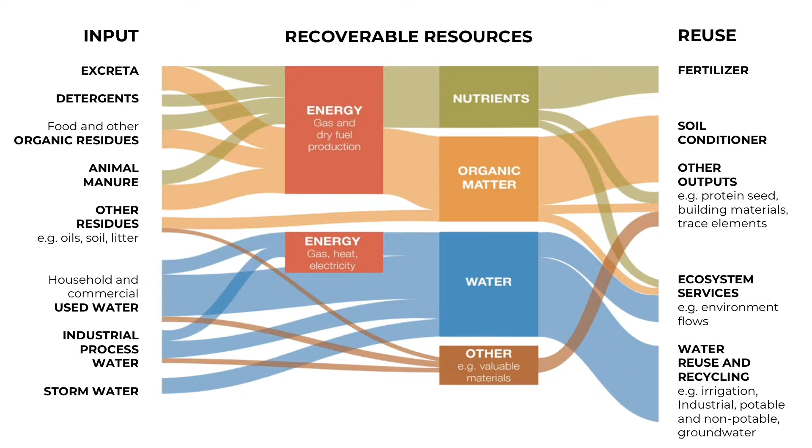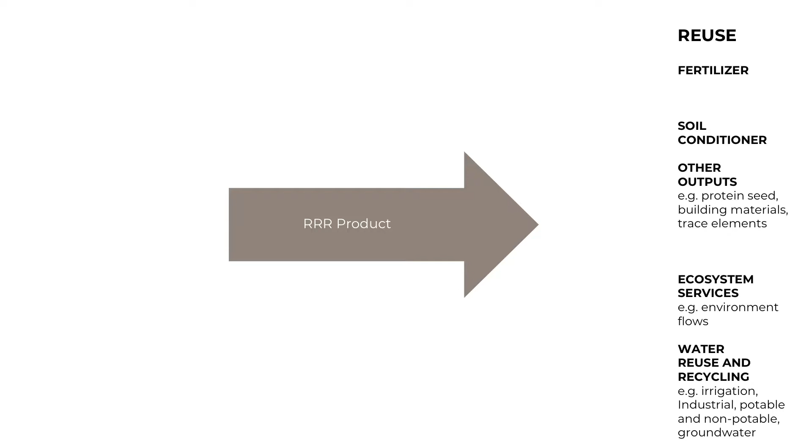To get us started, let me go back to the overview of waste resource options that you were already introduced to in module 1. On the right side, you have the RRR product options that you will eventually envisage to sell. On the left side, you have the raw material that you need to get there: human excreta, organic residue, animal manure, and used water from households or industry. Remember, this is the most important resource to actually get to a RRR product, so you want to make sure it is available in the desired quantity and quality.

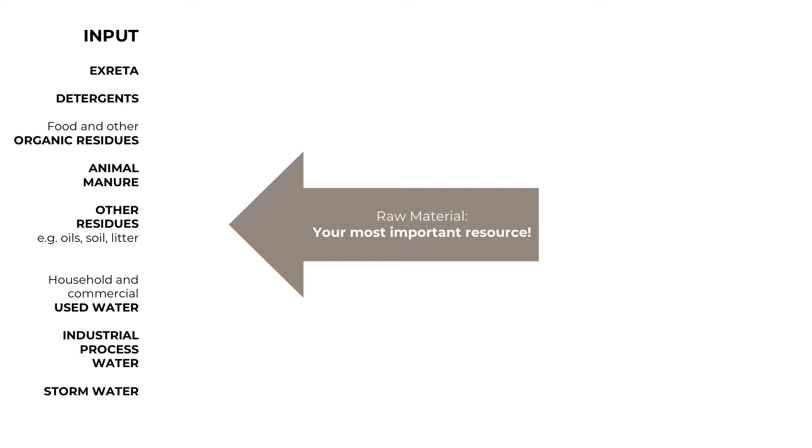If you think about it, waste is simply unutilized raw material that is discarded by someone because it has no value to them.

If we think this through, it's a very individual thing to see something as waste. Since you're interested in becoming a RRR entrepreneur, you probably see this slightly different already, as you know that technically waste is made up of different materials and chemical compounds which can potentially be utilized in a different way, like nutrients, water, and other valuable materials.

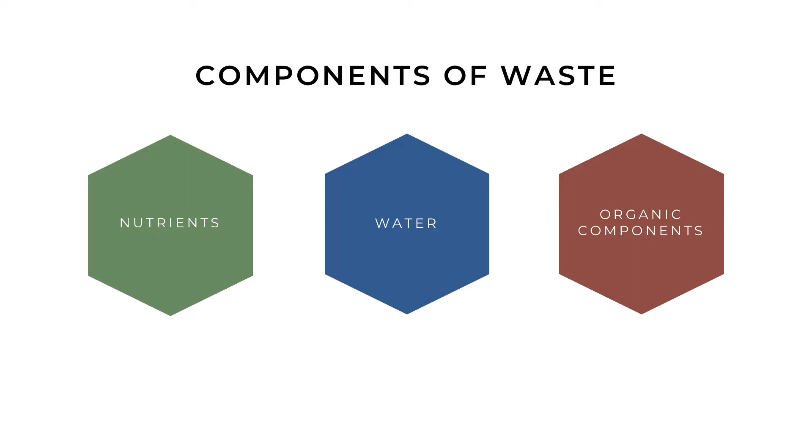While society in general has understood that paper, glass, metal, and plastics are valuable materials that should be recovered and reused, people are hardly sensitized to the value of nutrients, water, and other valuable materials, with a few exceptions.

Singapore, for example, is a country with very little access to fresh water. This is why they recycle the bulk of the wastewater for non-potable industrial use and cooling. This is equivalent to about 40% of Singapore's daily overall water demand.

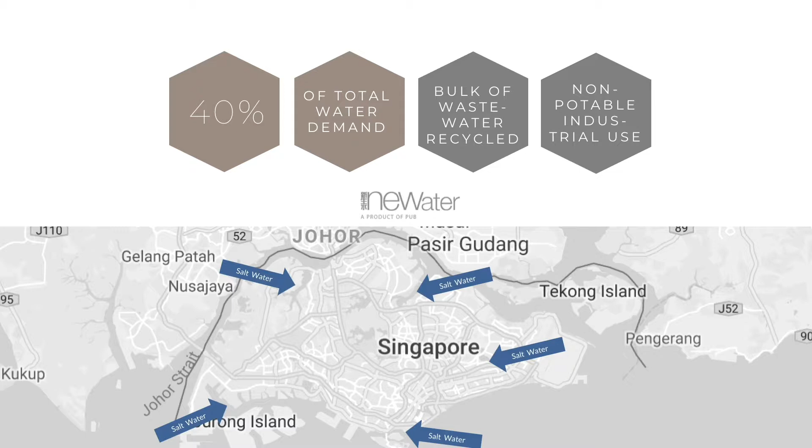Building on that nice example, just be aware that what people consider as waste depends very much on an individual person and their needs, the location the material is at, the potential for future use, the timing of use, and many other factors.

These factors are not something you have to analyze comprehensively right away, but you definitely have to keep these in mind when you get to analyze your customers in Module 3.

But let's first look at the challenge, which is basically finding the value or the added value that you can derive from waste in order to convert it into a business.

Sounds complex? Agreed, but let me give you an example. Let's look at A2Z Infrastructure Limited. This is a RRR business from India, which has formed a public-private partnership with the municipality to produce nutrient-rich organic fertilizers from municipal solid waste.

Market waste is primarily organic waste, such as leaves, skins, and unsold food discarded at or near food markets. Wastewater is a combination of water and waste from, for example, the kitchen, bathroom, or toilet, discharged by households and institutions as well as industries. Wastewater is often mixed with stormwater, and it is typically transported through a sewage system.

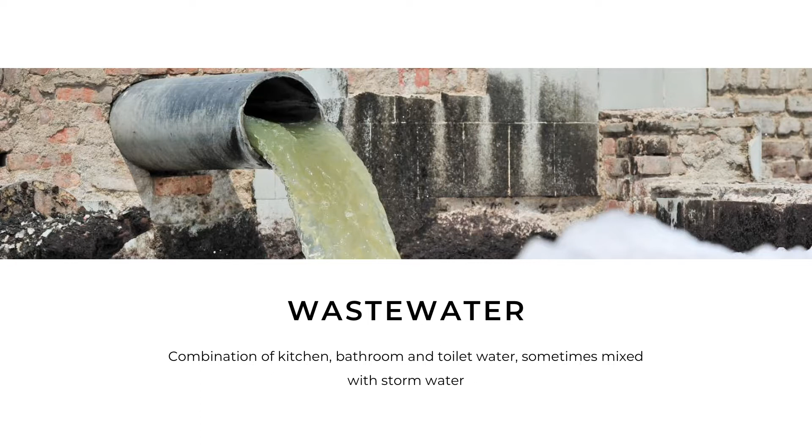When we move on to fecal sludge, we're looking at human excreta that is contained oftentimes in pits and vaults, where the household is not connected to a sewer system. Be aware, pit latrines and similar solutions are the predominant toilet systems worldwide.

Agro-industrial waste are agricultural and industrial residues. Agricultural residues can be further divided into field residues and process residues. Field residues are residues left in the field after crop harvesting, consisting of leaves, stalks, and stems. Process residues are present after the crop is processed at the farm, comprising roots and bagasse.

Industrial residues, on the other hand, occur at food processing factories and include potato skins, fruit seeds, coconut oil cake, etc. Finally, we have animal waste, which is the excreta of animals generated in animal farms.

Now, what is super important is that when naming your primary waste stream, you're as specific as possible. Just naming wastewater as your waste source is too general. Is it wastewater from households or from institutions like schools or industries? You may even already have an idea which exact area or institution you will source your wastewater from. So make that as specific as possible to get clarity on what your primary waste stream is.

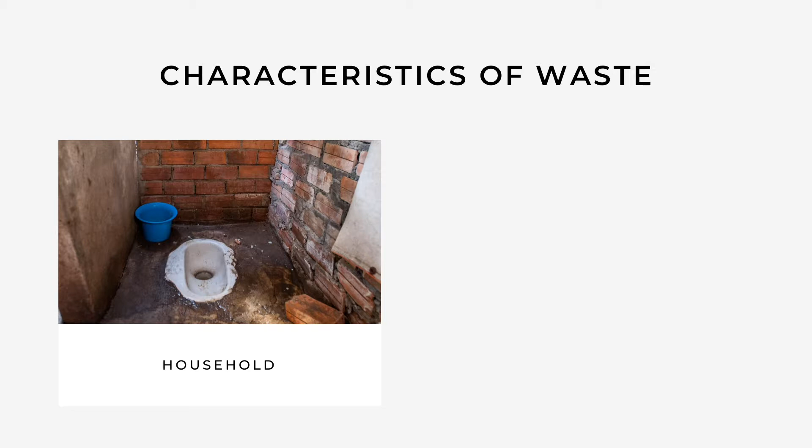The quality of waste streams differs depending on where you get it from and when you get it. Fecal sludge from households, for example, has a different quality than that from public toilets. So ideally, you want to find a waste source that offers good quality. What does that mean? For example, high percentage of organic materials, or clean waste that is already separated at source. Waste with limited contaminations, think heavy metals, pathogens, all the bad stuff.

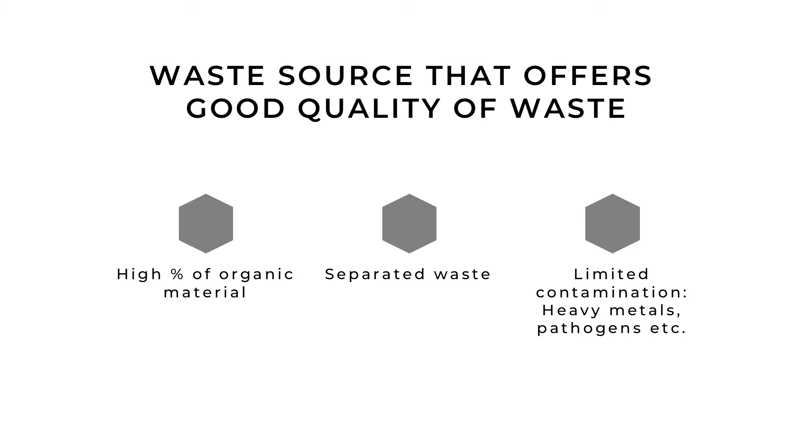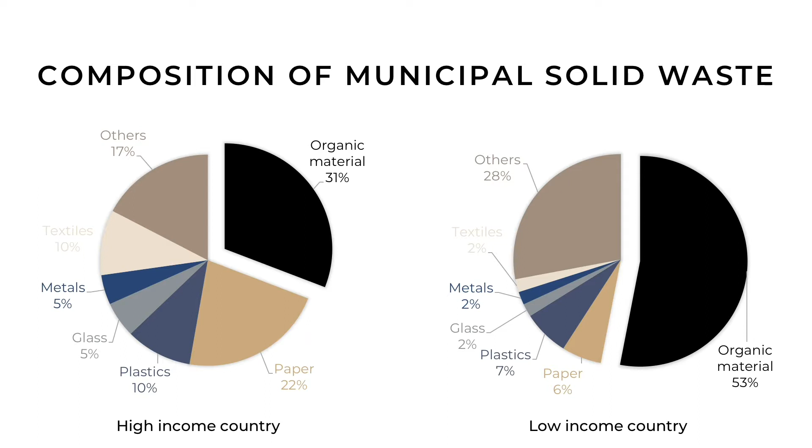What could it be? But what are other quality criteria that you should look at? That's something that depends on your business model and what are ideal parameters for the technology or the processes that you will be using. Moisture content in waste, for example, is something that can be beneficial if you want to produce biogas. But if you move into composting, it's something you need to reduce.

For producing nutrient-rich fertilizer for tea plantations, for example, the input waste ideally already contains high levels of those macro and micronutrients that the tea plant requires. And here you see, in some cases, it might not be easy for you to determine the exact parameters that are beneficial to your startup at the outset.

So what we suggest is that you actually, in those cases, start prototyping and producing your first products right away. Start applying them to then gradually improve the products, and in that process, get clarity on what defines key quality criteria in the waste streams that you need.

Another key question is, where is your waste currently located? Let's see. If your waste source is animal manure, you will most likely find this in rural areas where most farmland is. So if you want to produce biogas for urban households from this manure, you have to factor in higher transportation costs. The same applies if you have to collect your waste from individual households. This collection will have a significant impact on your transportation costs.

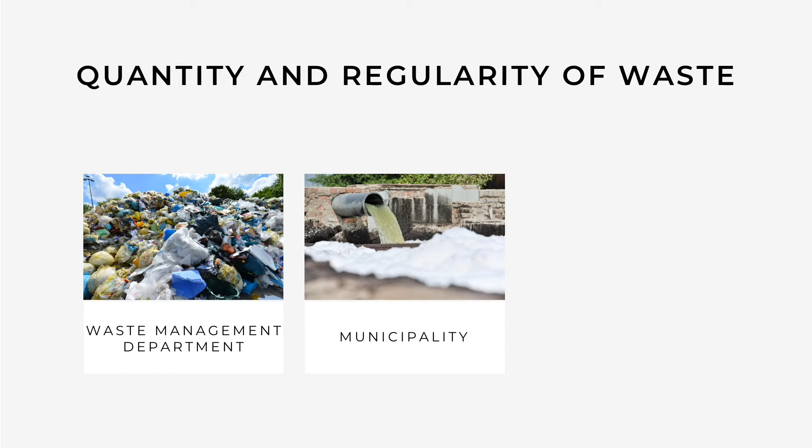Finding data on fecal sludge, that is something a bit more tricky. What are the types of toilet systems used by different households and institutions? What's the emptying frequency? What are transportation services like? This you don't easily find in statistics, but you can look into census data on household characteristics for some aspects.

Interview sanitation experts. Talk with desludging operators. And look at what the data is about fecal sludge treatment in different plants in the area, and look at where dumping places are to collect some initial data. This is just some first ideas.

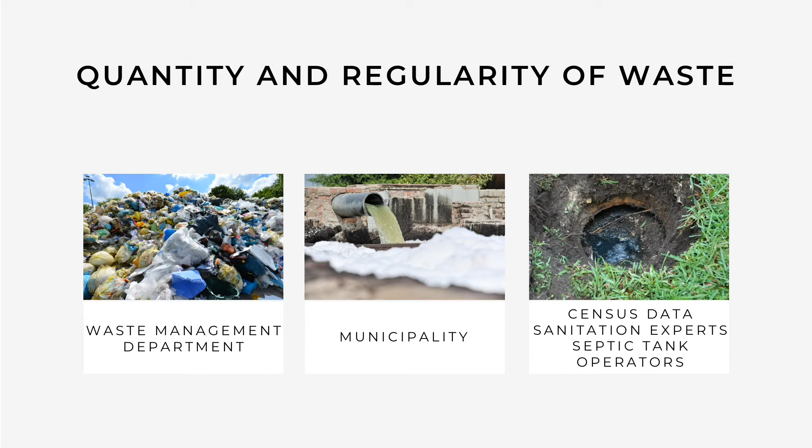To get an idea on the quantity of waste, what's important is that you correlate information that you can generate on your desk and through discussions with actual insights that you get in the field. So good points always to go out there and look yourself.

Let's look at who owns the waste and how much it costs. This might seem strange to you, particularly because you see that wastewater is currently being discharged into rivers and no one seems to care about the resulting pollution. But in some cases, there are laws and regulations regarding municipal wastewater, for example.

In this case, it is often the municipality that regulates and owns the wastewater. In the worst case, it is illegal to use this wastewater for any other purpose or by a private business like you. Or a waste stream might already be contractually bound to a competitor.

Same applies if you want to source industrial wastewater. Here it's quite likely that the factory who produces the wastewater owns the waste stream. That doesn't mean that you cannot use it. But if there's high demand for water, or if there's many RRR businesses around, it means that you may have to buy the waste stream off of the producer. And depending on a number of external factors, the selling price for your raw material will vary.

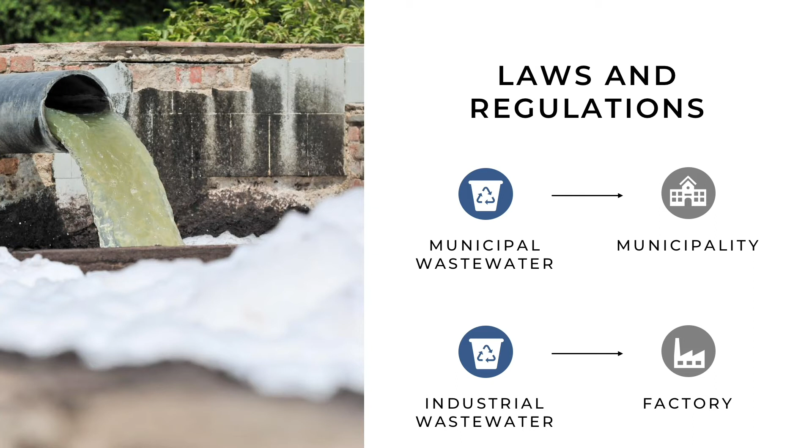Now, at one point, HPS faced significant challenges in procuring and sourcing rice husk for the gasifier at a suitable price. Suppliers at one point, so the rice mill operators and farmers, they even started demanding higher prices. So what did HPS do? They countered this by establishing their own rice mill, where they offered milling services at no cost in return for the rice husk. Now, this, in return, forced the suppliers to enter longer-term contracts at fixed prices.

Another key question is whether the waste stream is accepted by your community. Most importantly, your customer has to be ready to buy a product that is made from waste. In some cultures, the acceptance of organic fertilizer or even briquettes is very low if they come from human excreta, so fecal sludge or wastewater. In this case, it will take considerable awareness raising and promotional efforts to be able to sell these products.